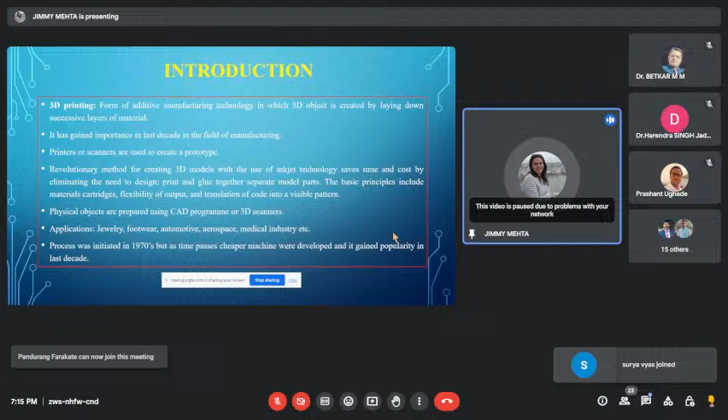A CAD program, the computer aided design program, is being used, and the process was initiated in the 1970s by Charles Hull and a Japanese doctor. This is successive addition of layers of material, one onto the other, rather than using traditional subtractive methods.

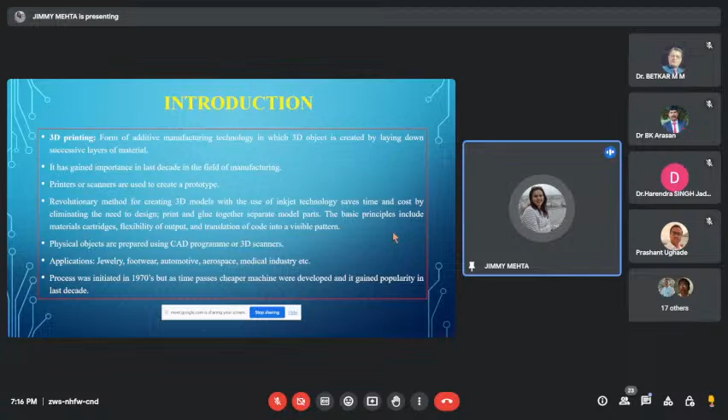This is a basic 3D printer, and there are many types available. If we talk about inkjet printers, looking at the first figure, the down part, this arrow part, is the base, and here a roller is being applied to this base material.

A roller is applied, and here this inkjet head is there, and this orange highlighted part is the material we are preparing. Sideways is the supporting powder, so that it supports whatever we are inputting. The roller provides the raw material in powdered form. This is the input raw material, and a fully 3D object is being prepared.

The next type of 3D printer is the fused deposition modeling process, in which the rollers hold the support material, the build process is made on this tabletop, and here the liquid is being used to do the work.

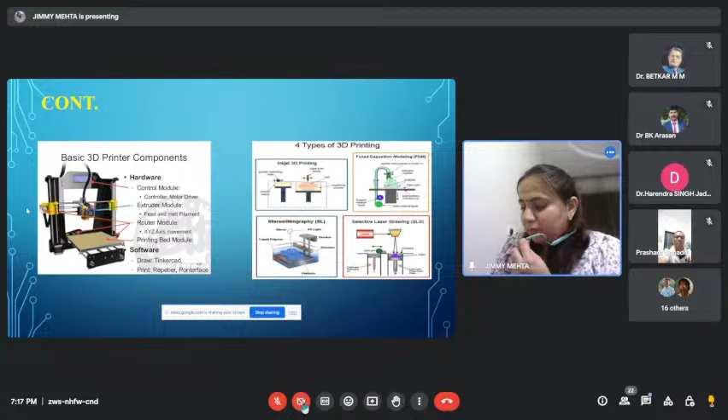This is also a type of additive manufacturing process, where the product is made up in the X, Y, and Z direction. The full 3D model is prepared, and here a foam slab is there just to support the material.

Then third is stereolithography, where a mirror is used for UV rays, and there is an elevator and a sweeper. Lastly comes the selective laser sintering process, where laser light is used for scanning, and the part is built in powdered material, again with our raw material in powdered form only.

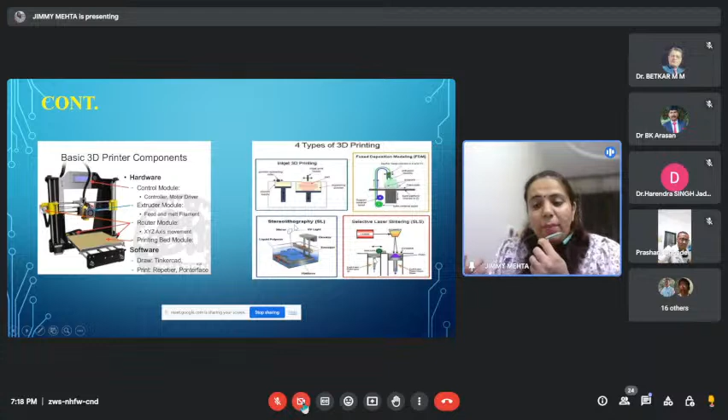So powder form and wire form are the basic forms of raw material being used. Now the major steps we discussed earlier: first is development of material, deciding which material we want to use, let's suppose powder or wire. Then a CAD model is prepared using software such as AutoCAD or SolidWorks.

In the figure, you can see clearly it is mentioned X, Y, and Z direction. All three components, the mug, the vase, have some width, some length, and some thickness also. This is the first step of customization, meaning what we want, what we think in our mind.

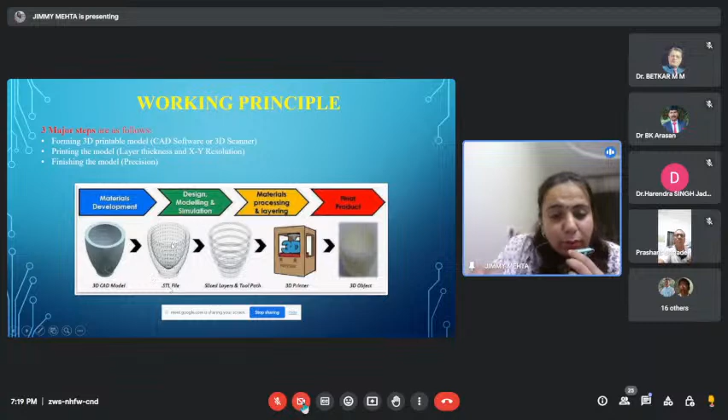So this is the first step. I want a pink color vase, I want a green color flowered mask, anything - whatever is in your mind, you prepare a model for that. Then the file is saved in .stl format, which is standard triangle language. If you see clearly, the vase is divided into small triangles for its dimensions.

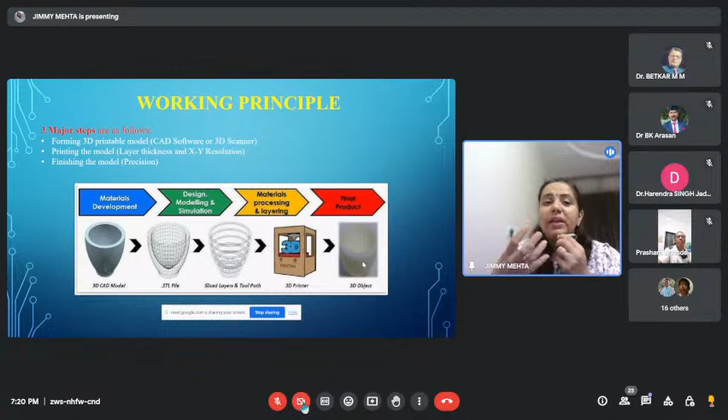Then this is a sliced layer, meaning addition of layer, how material is added from the base, then to the top a small material is added. This is again the 3D printer for development, and this is the final product. The product comes out in white or off-white color, but if the raw material - the wire or powder - is of green color or red color, any color or design can be prepared using this method.

So the best part is we can do post-processing after the object is made, like we do in traditional methods - grinding, to get the proper required surface finish. In this technique of additive manufacturing too, we can clear the raw material if anything extra is added to that.

Next comes the forming and modeling. Again, the steps are being mentioned here in detail. A model is being prepared using CAD software or a scanner, then modeling is done based on whatever we design, whatever is in our mind, and then comes the printing part.

After the thorough finish, the printing is slightly oversized at standard resolution, and extra material is removed to obtain the required accuracy and precision. Obviously a little tolerance is there. Sometimes tolerance is added, and sometimes an exact product is made.

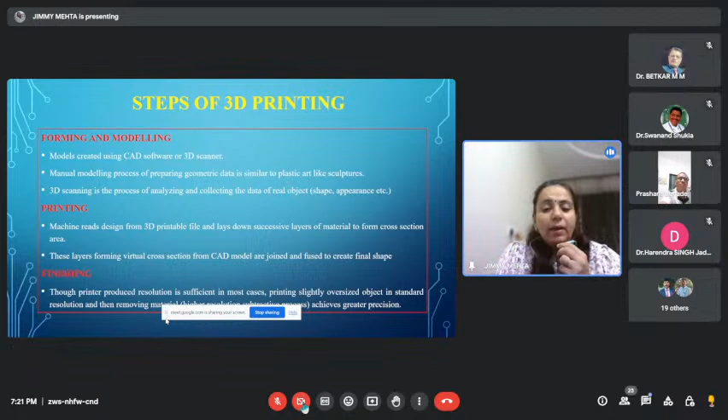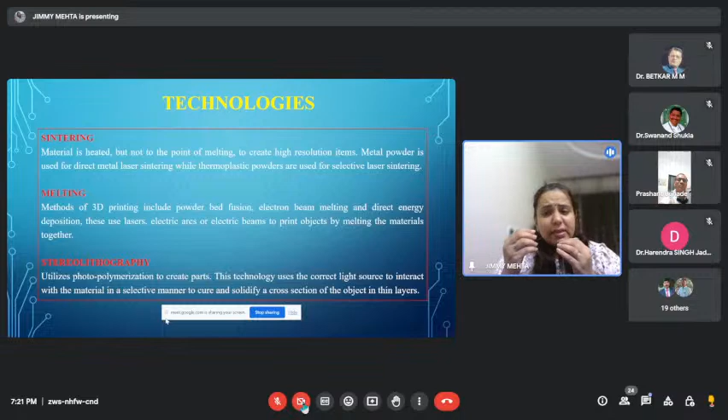Then comes sintering, melting, and lastly stereolithography. Sintering is when material is heated, but not up to its melting point. It goes into some semi-solid form, which is generally used as a raw material for the process so that it can flow very easily. Have you seen a hot glue gun?

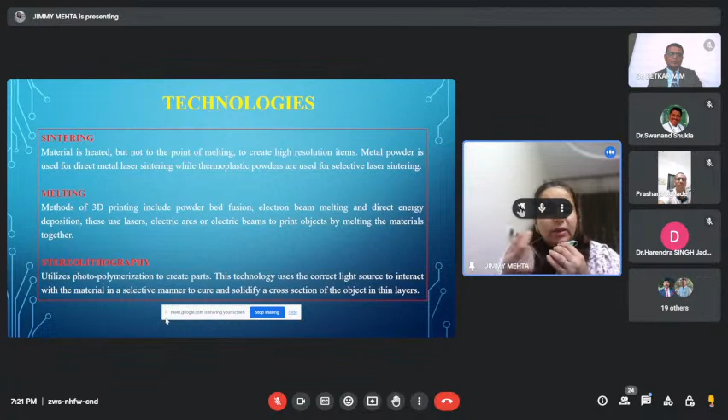The glues are in the form of small cylinders, pencil form, pen form. They are small sticks of glue, and when inserted into the machine, the small gun machine, they come into liquid form. Heat energy is introduced, and the material is not heated up to its melting point, but up to a certain level.

Then comes the melting part. There are many different methods for melting 3D printing models, like powder bed fusion, electron beam, and direct energy deposition. There are many other methods also.

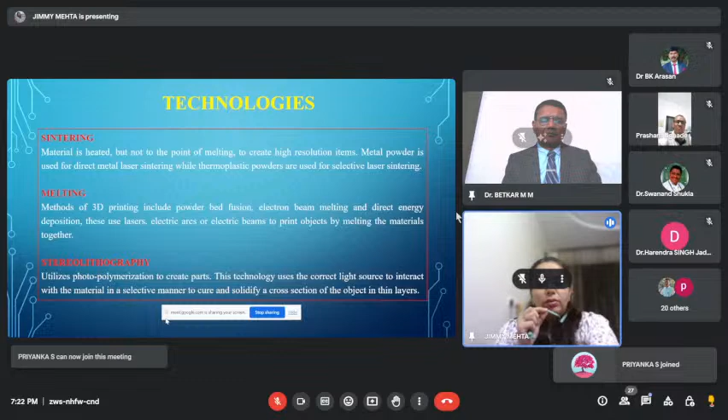Then comes stereolithography, where the object is solidified into thin layers, and a cross-sectional object can be observed. As for raw materials, we generally say plastics are not to be used anymore - plastics are a waste of material.

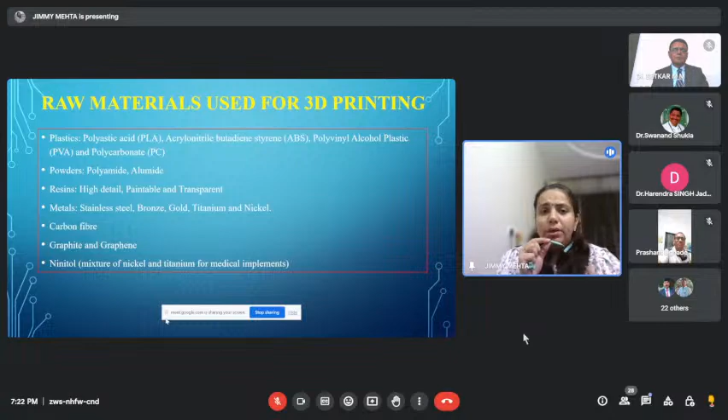But these plastics can be used and reused again and again to manufacture customized products - the products we want, the designs we want, the shape and size and dimensions we want. So powders can be used, some resins can be used, and metals also can be sintered.

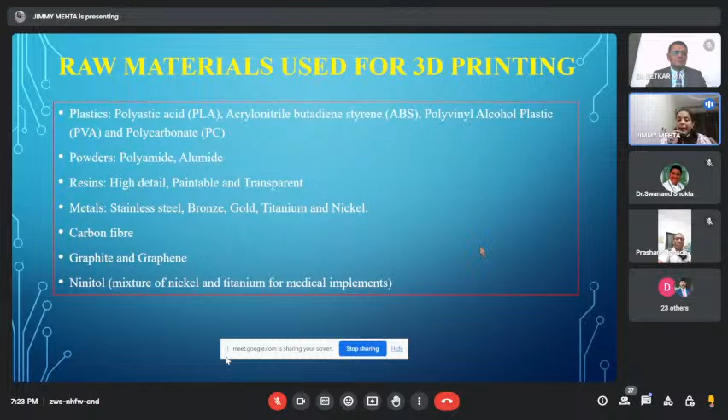Metals can also be brought up to their melting point and then used. Metals generally like stainless steel, mild steel, gold, titanium, carbon fibers - that includes graphite and graphene - and nitinol, which is a mixture of two components, nickel and titanium, used for medical implants.

Similarly, composite materials and ceramics - many types of raw materials can be used. But the most common raw material used is plastic. Plastic is one of the basic raw materials that can be used in any form.

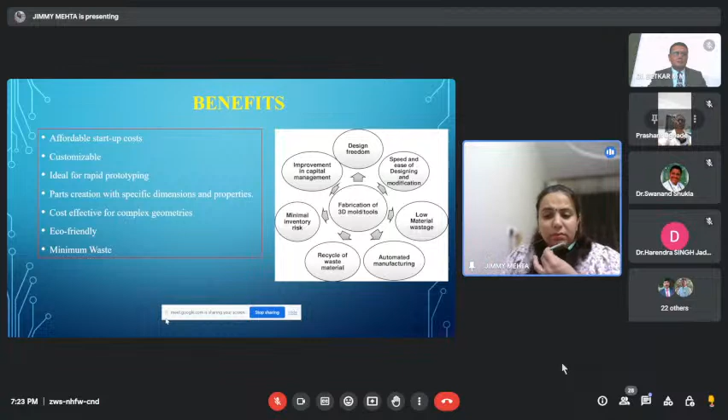Then comes the benefits of this additive manufacturing technique. Obviously, it is a very new technique - almost 3 decades old - but it has very high benefits.

The first and major benefit is customization. Then there's recycling of waste material. Then there's improvement in cost and time, and the effort a particular person puts in. The speed of designing and fabrication is improved because within a single design, multiple objects can be made.

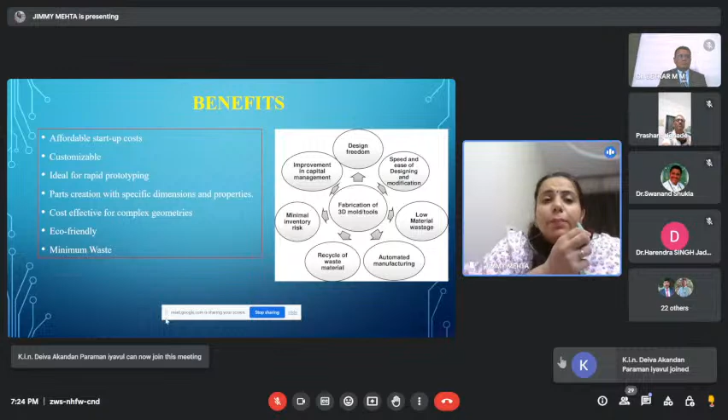If the raw material is in powdered form and inserted time to time, very high speed can be observed. There is very low or minimum wastage of material because layers are added to get the exact height and width of the product.

There is no cutting, there is no reducing of material - that is why it is termed additive.

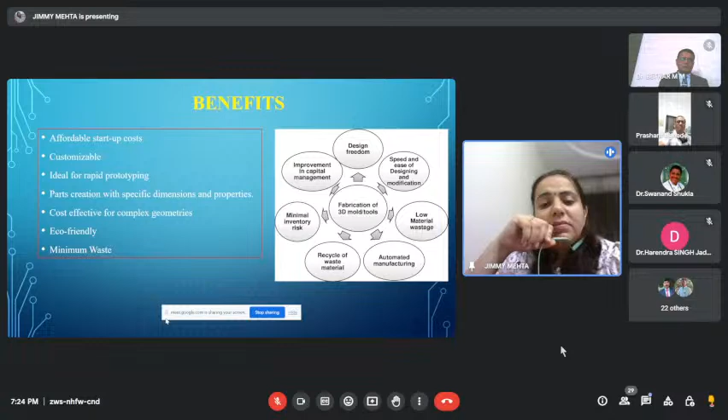One of the best parts is it has minimum inventory risk because raw material can be used once, or used again and again. It can be recycled also, and it gives an aesthetic, pleasant view of the object we have designed and what we want.

So to list a few benefits, I have written things like affordable startup cost - meaning if I want to start my business of customizing pens, pencils, bottles, mobile covers, anything.

Have you seen nowadays resins being used for 3D models that solidify, and your product or medal is created, the pendant is created, earrings are prepared? So there are multiple uses of these additive techniques.

So we can't design the plant layout on paper and say this machine will be kept here, this machine will be kept there, grinding will be done here, then surface grinding will be done there. That is not something that can be done on paper.

Nowadays it has been computerized and we make small models. If we've ever entered a big hotel or restaurant, we can see at the entrance a big layout of the whole property under that area - the full dimensions, a building, a green area, a lobby. At every hotel, even in hospitals nowadays, a full layout of the area is mentioned right at the entrance.

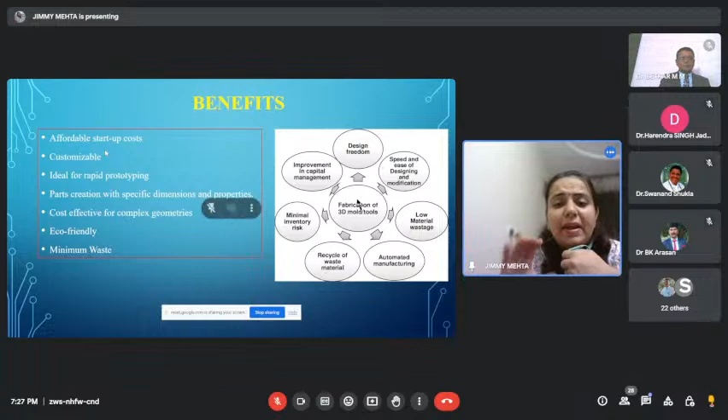If the person has a full layout of the property, the hospital, the hotel, whatever it is, the small instance can be made very clearly. We don't make the whole hotel in one night, but we can make the whole idea from pen and paper to a 3D model in just 1 hour. So that is the transition.

Earlier, what our ancestors had, the machining operations, things are being revolutionized, using new technologies and techniques. Things are becoming easier with minimum wastage, and sustainable development is now being promoted, so products are biodegradable and eco-friendly.

The major thing I forgot is complex geometries. If we have to make very intricate, very complex designs, that is not possible using traditional methods, using a lathe machine or milling machine. Even using ECM or other non-traditional techniques where tool and product are not in direct contact, that is also not possible.

For that purpose only, we use complex geometries, intricate steps, interiors. If there is a hole in between, narrow or wide, or there are steps within a part, the interior designing part - these complex geometries can be very easily made using additive techniques.

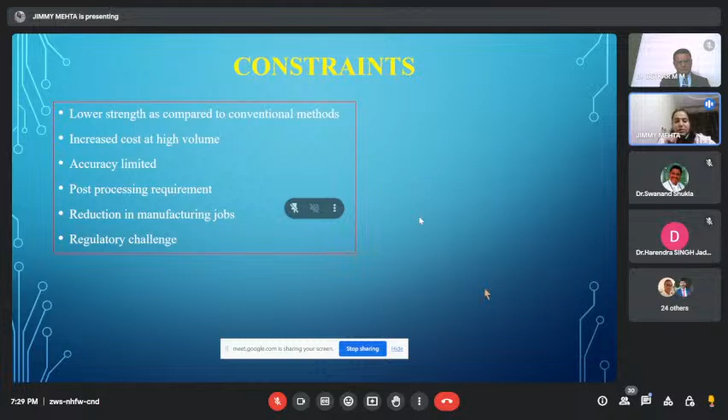It also has increased cost at high volume. When the number of products is raised to a higher level, the cost of the raw material plastic is not so costly, but the machining cost goes up to a higher level.

Then accuracy is limited in this case. When multiple products are being manufactured, accuracy gets limited, precision is minimized - not because the machine is worn out, but just because the same process is being repeated again and again.

Post processing requirements are again there. If there is extra powder pasted, or in lamination sometimes the sheet gets extras on the outside, we have to cut that extra part. So that is a post processing requirement we generally need.

Then there is reduction in manufacturing jobs, where laborers had continuous 8, 10, 12 hour shifts. Jobs are reducing as just one single person can observe a small tabletop machine producing multiple products. Just like initially where to operate a lathe there were 4 to 5 people for different operations, but in this, just one single person is required.

And then there are regulatory challenges because the material is developed in all 3 dimensions, so a regularity check is needed for what dimensions are required versus what is prepared, because this is customization work. It's not like whatever the customer thinks is always right - customization is still being checked, so regulatory challenges are there.

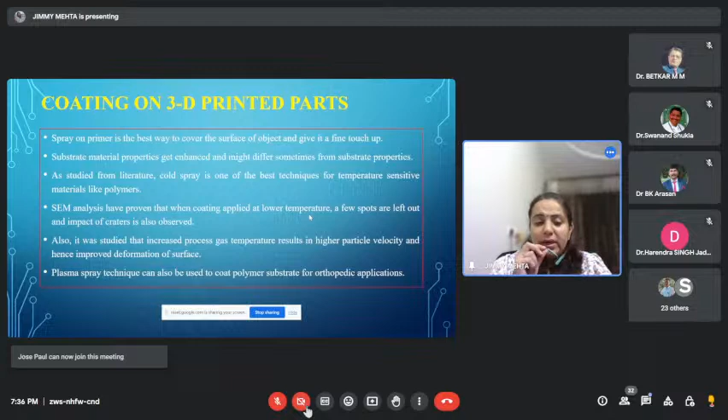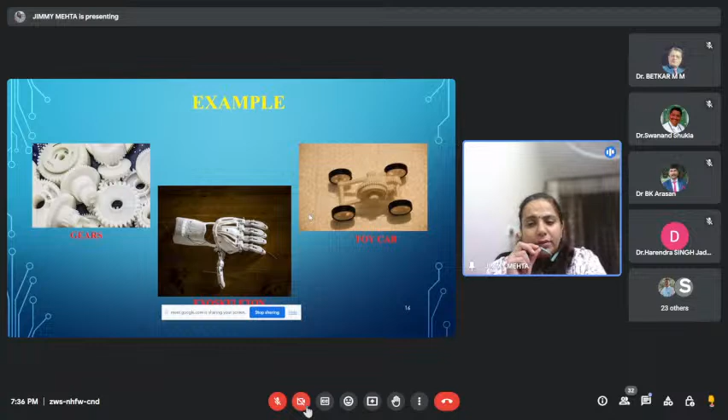Here these 3D parts, like in the first slide, if you can see, the product is made up of off-white color. Here the product is off-white and black, the toy car. In the starting I showed you the mug version in white color.

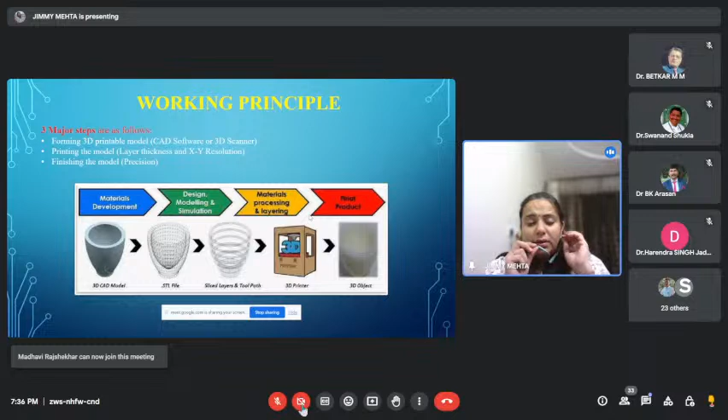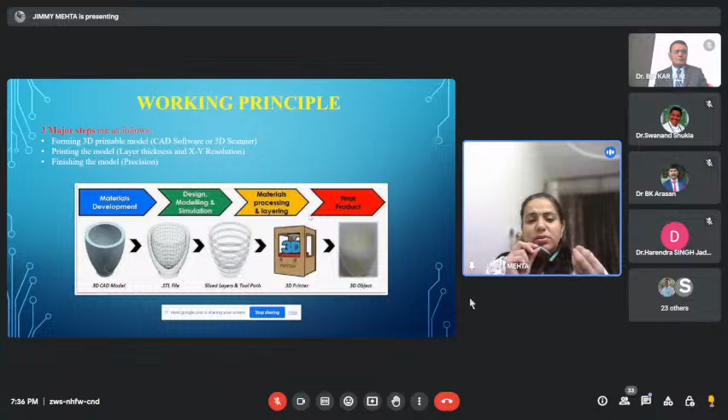So these objects, if they are being colored, decorated, or coated - just like we coat our nails with nail paint, or coat the walls of our house just to give them grace - it's done to enhance the product that we have made.

So this is also again that thing, that these products can be coated, these products can be printed - just like we have seen water bottles having kids' names on them, names on tiffin boxes nowadays. It's in a trend, it's in high trend.

So these are all just using coating, using different color combinations, and coating the layer with that particular name, those particular alphabets, those particular designs. So these coatings are just to embrace, to give a decorative beautiful look to the entire work, and definitely enhance the work life also.

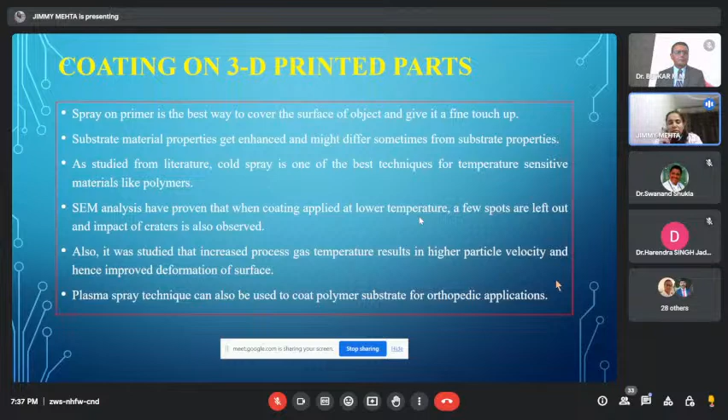So this was all for my presentation today, and I hope you all had a great time, because this is a really new topic, a really new thing that many researchers and scholars are working on daily.

If you look at journals or newspapers about additive techniques, you find every day something new being built and used. Let's take a pen or a knife - these can be made using additive techniques. Earlier we had Natraj pencils that were red and black, or Apsara pencils that were black. But now kids' pencils have cartoon prints on them. That is again an additive technique.

The coating has been done using cartoon prints on the pencils. Earlier we had gift wrapping paper in simple golden, silver, red, and black. But now that paper material is also evolving. This shows the development of how things were traditionally used, and how technology has revolutionized our world and the things we use.

So I hope that was good. Hope you all had a great time listening to that. If you have any queries related to this topic, please go ahead.